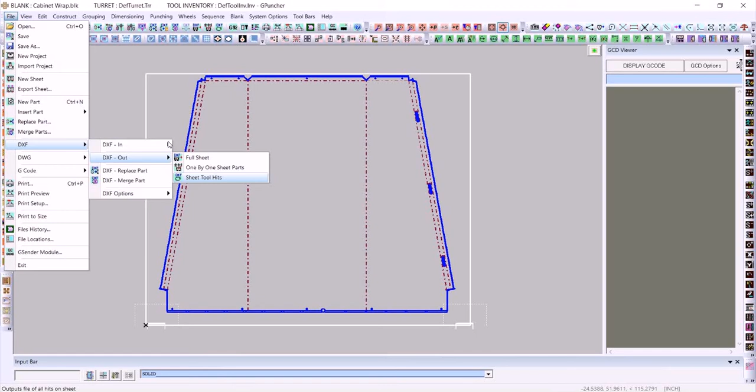It's doing the file, and now it's asking me to save it. I'm going to call it remnant. Hopefully I spell it right, and I'm going to save it.

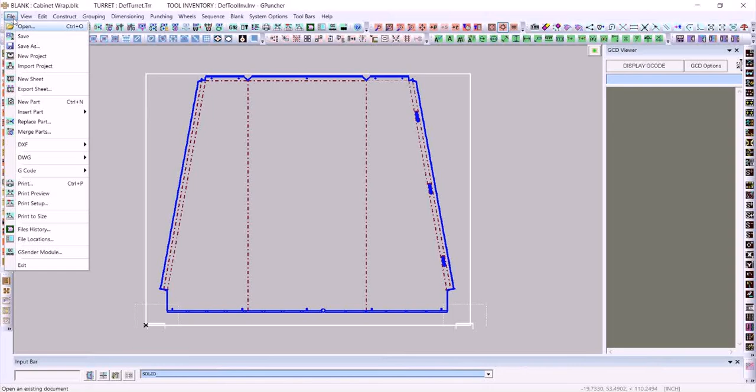Now I'm going to start a new project. We have an option here that says set sheet as a DXF. When I click it, it's going to ask for the DXF file I want as a sheet. I'm going to click it, and say open.

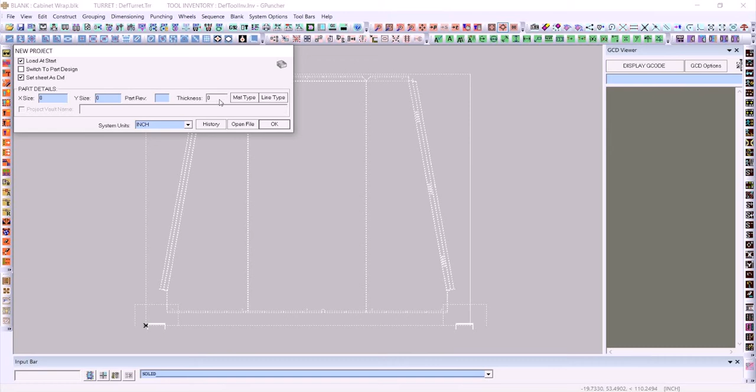You can see in the background, GPuncher automatically set the sheet as the file. And since I already have a part, I don't need to start with any part, so I'll say 00, click OK. Then I'll set the material, which I'll change to 14 gauge galvanized. It's got to be the real material you're using. And I'll click OK.

So if I zoom in, let's zoom in a little bit. You can see all the way around that the hits are there too. Okay, let me zoom in more. You can see them. Now I'm going to zoom out.

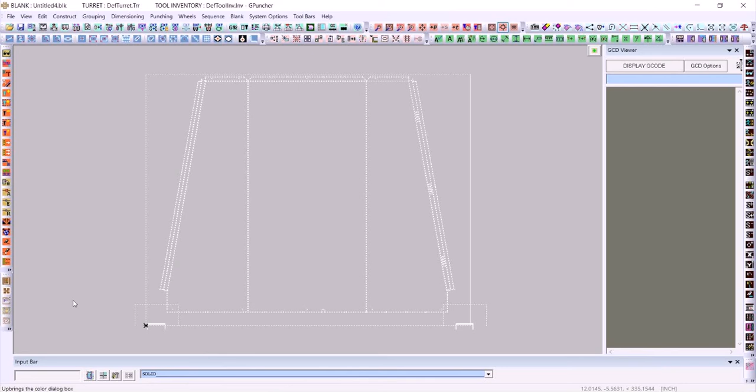It's kind of white, I don't like it. Let me change the color real quick so you see more clearly. So that's my sheet. And I'm going to zoom in again.

Now on this corner, you can see the hits along with the geometry. So now I know what was the useful part of the sheet, which is this area. And this area here is already punched out, so you cannot use it.

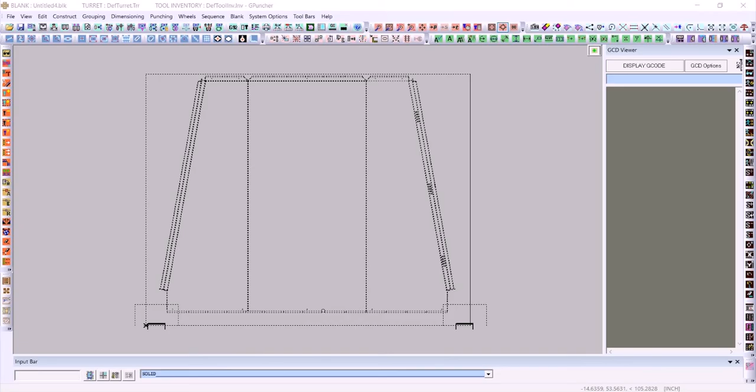I'm going to import a part so I can punch it. I'll say insert part, file, and go to the parts folder. I'm going to use the corner plate, because I need some parts and I'm going to reuse the portion that I can on this. So I'll place it there and here.

And out of it, I can always make a grid. I'm going to expand these, and say I want to get 2 in Y. Of course, I've got to reduce the spacing to 0.75. Same thing with this one: reduce the spacing to 0.75 and increase the quantity.

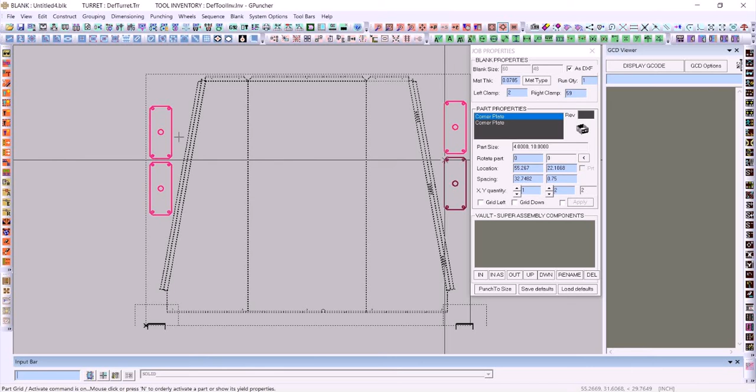And that's how you would use the remnant or leftovers of any project. Thank you for attending this GPuncher tutorial. Hopefully this option helps you maximize the use of your material.